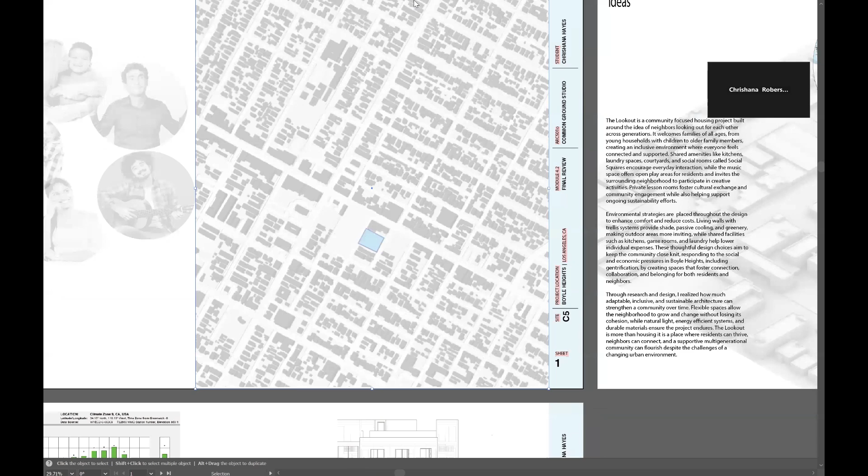The Lookout is a community-focused housing project built around the idea of neighbors looking out for each other across generations. It welcomes families of all ages, from young households with children to older family members, creating an inclusive environment where everyone feels connected and supported.

Shared amenities like kitchens, laundry spaces, courtyards, and social rooms called social squares encourage everyday interaction, while the music space offers open play areas for residents and invites the surrounding neighborhood to participate in creative activities. Private lesson rooms foster cultural exchange and community engagement, while also helping support ongoing sustainability efforts.

Environmental strategies are placed throughout the design to enhance comfort and reduce costs. Living walls with trellis systems provide shade, passive cooling, and greenery, making outdoor areas more inviting, while shared facilities such as kitchens, game rooms, and laundry help lower individual expenses.

These thoughtful design choices aim to keep the community close-knit, responding to the social and economic pressures in Boyle Heights, including gentrification, by creating special spaces that foster connection, collaboration, and belonging for residents and neighbors.

Through research and design, I realized how much adaptable, inclusive, and sustainable architecture can strengthen a community over time. Flexible spaces allow the neighborhood to grow and change without losing its cohesion, while natural light, energy efficient systems, and durable materials ensure the project endures.

The Lookout is more than housing, it is a place where residents can thrive, neighbors can connect, and a supportive, multi generational community can flourish despite the challenges of a changing urban environment.

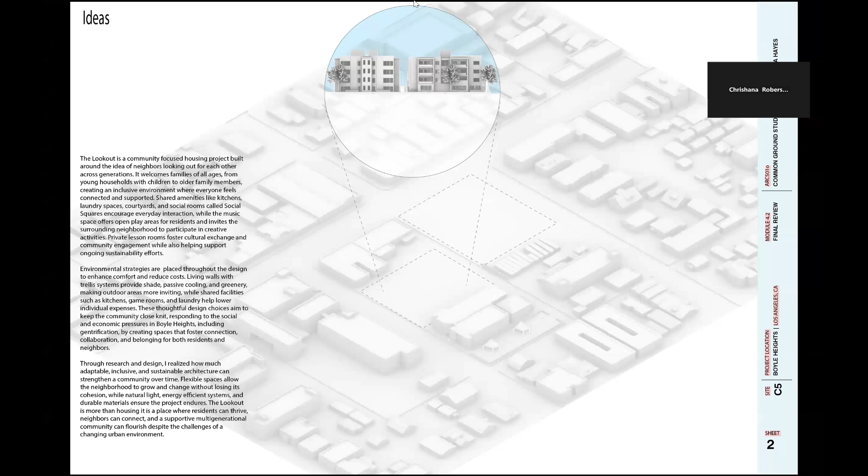Just a quick overview of my project progression. Initially, I started off with the typology of row housing, and that's just because I'm from Philadelphia and I'm used to the row house feel, and communities feeling like they're close-knit communities with people looking out for one another.

It wasn't really working out for me because I was only able to get 17 units on our site, and the site is already small. It's 25,000 square feet. Therefore, I ended up changing the typology and building up more and staying away from duplexes, and I was able to get 44 units on site. But I did keep the idea of the Lookout by naming my project the Lookout.

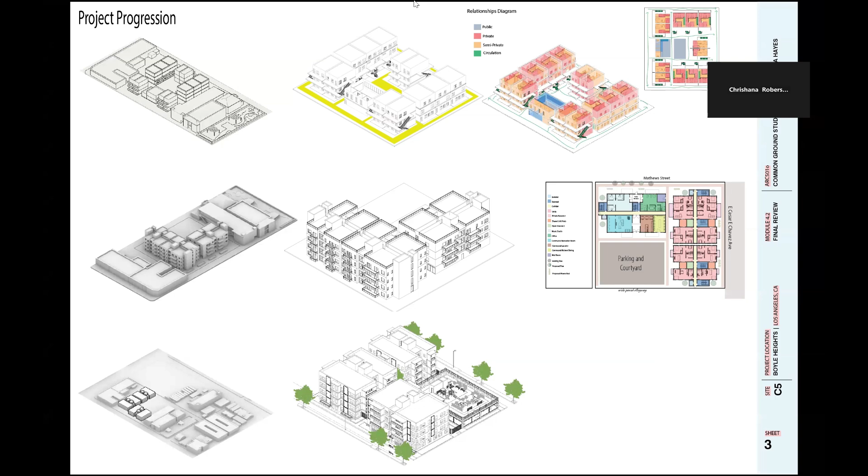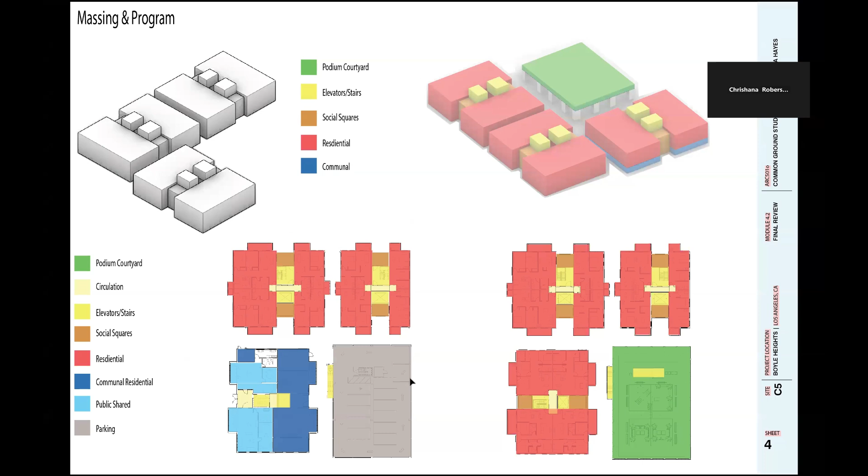Massing program level 1 here. This building only consists of communal residential and public shared spaces. Levels 2, 3, and 4 for this building consist of residential units, while these two buildings here consist of only residential. Level 1 for this area is for parking, while over here level 2 is for the podium courtyard.

This is the site. We're located at Mathews Street and Cesar Chavez. It's 170 by 150. Setback for the front and back is 15 feet and the sides are 5 feet. And then here's the neighboring proposed site.

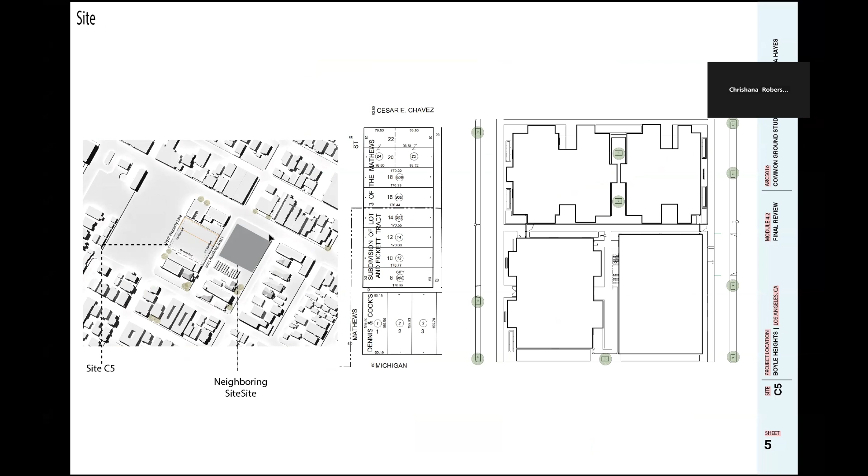Due to frequent heat events, my project has 3 buildings with the main entrance facing west and the other 2 facing north. Each building has balconies and windows positioned for cross ventilation, allowing cool air to flow through and push warm air out. The walls feature trellises with plants that provide shade and help cool the air naturally.

Instead of the rooftop spaces like I initially wanted, I included a podium courtyard at the east end, shaded by greenery and sitting above the parking below.

This courtyard not only keeps surrounding units cooler, but also reinforces the Lookout community feel, serving as a central shared space where residents can gather, interact, and feel connected to each other. And then right here, we have a quick example of HVAC systems.

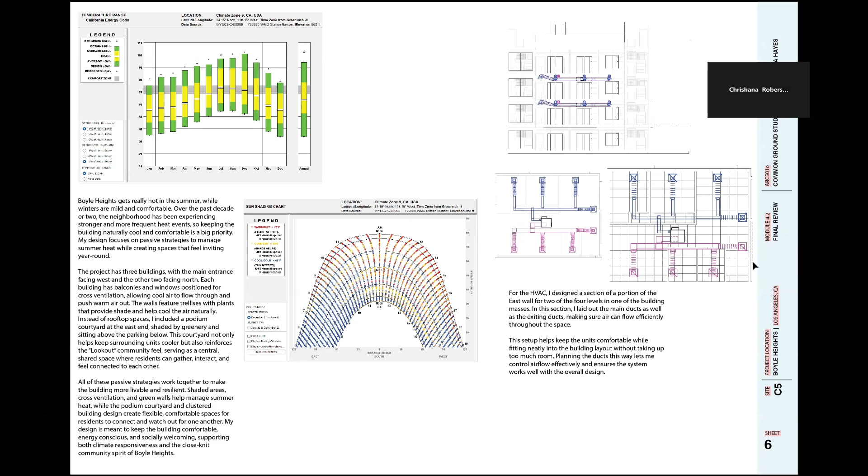Okay, have the floor plans for level 1, level 2, and levels 3 and 4, which I will explain. Okay, this is the podium courtyard.

It has an access point here from the outside, and then from the inside, from the parking below, it has access from the stairs and elevator. It consists of a walking path for residents, a children's play area with a playground, and then a seating area for adults and children, but plenty of seating areas. And then here we have some shaded greenery.

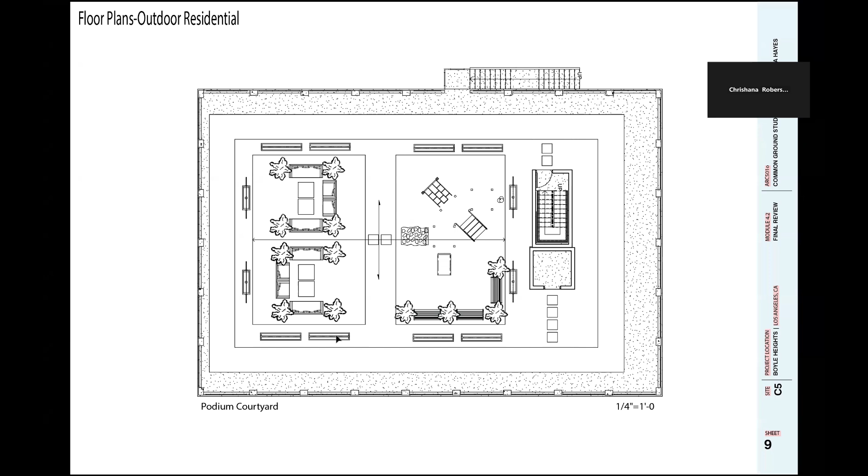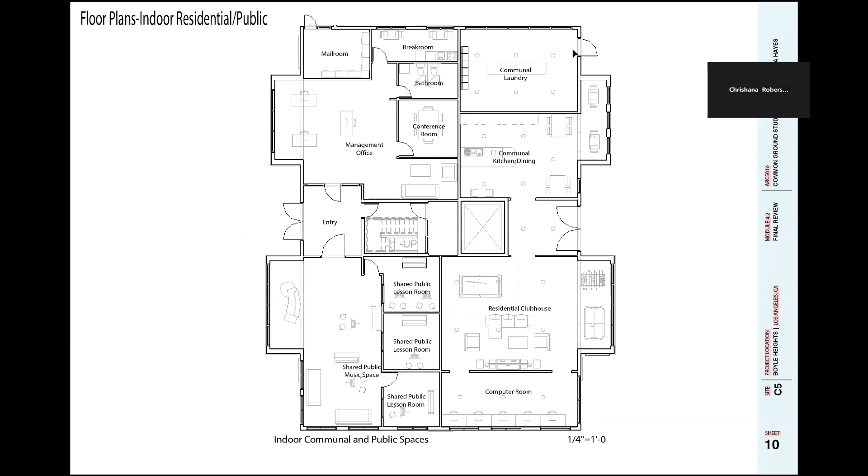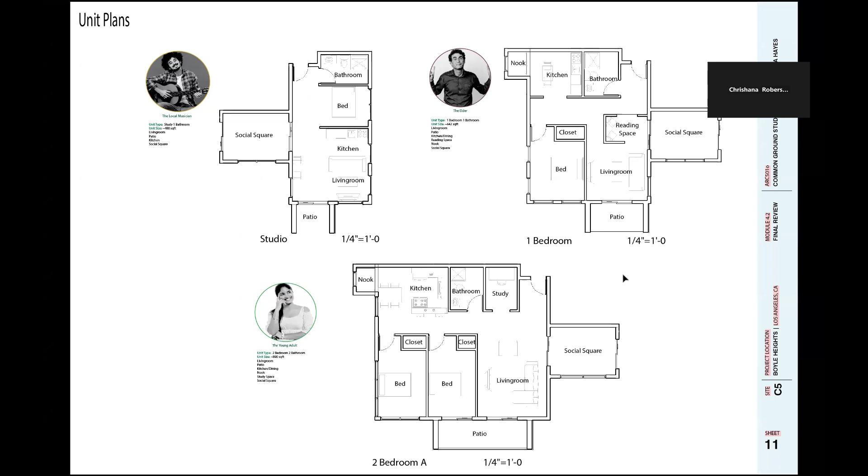So this is for the young adult, she is a student. It's a 2-bedroom, 1 bathroom. It does consist of a study and a nook as well. I wanted to add that for these specific units, they do offer the individual lease by room option for college students to make it more affordable.

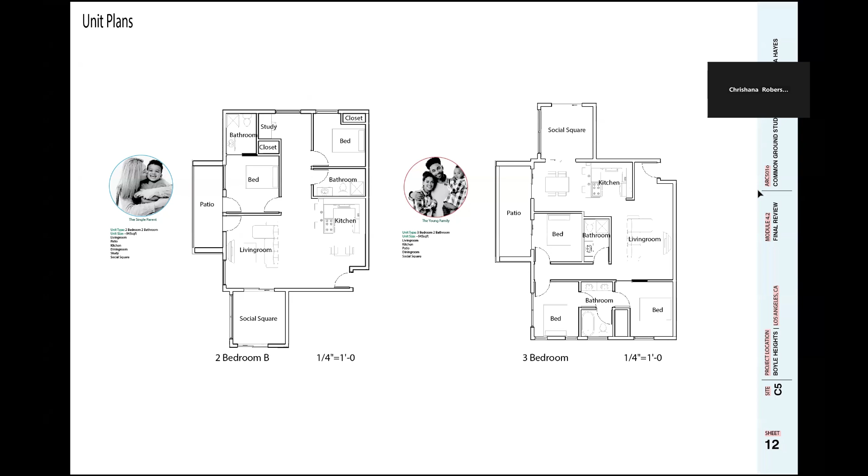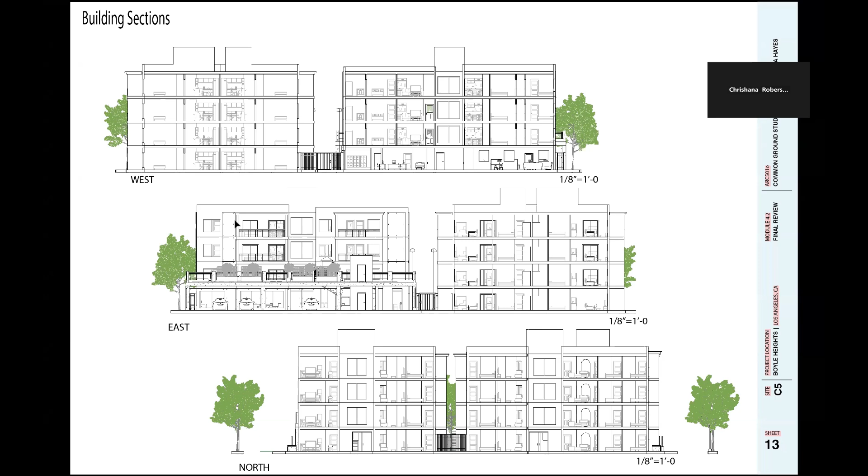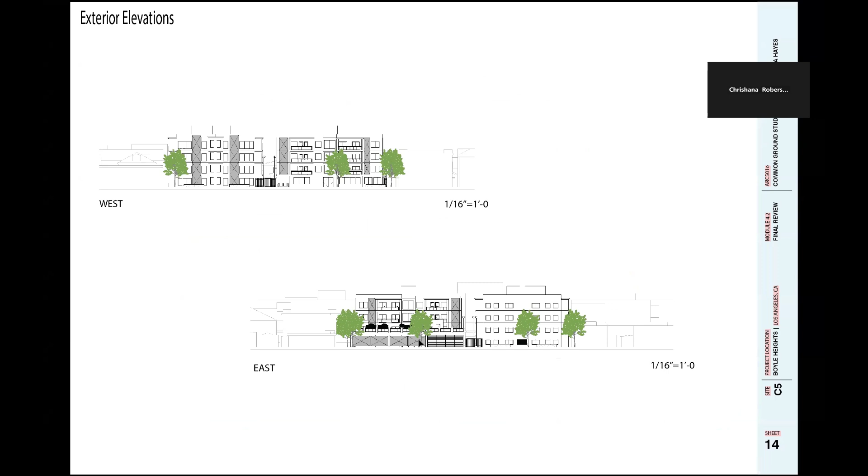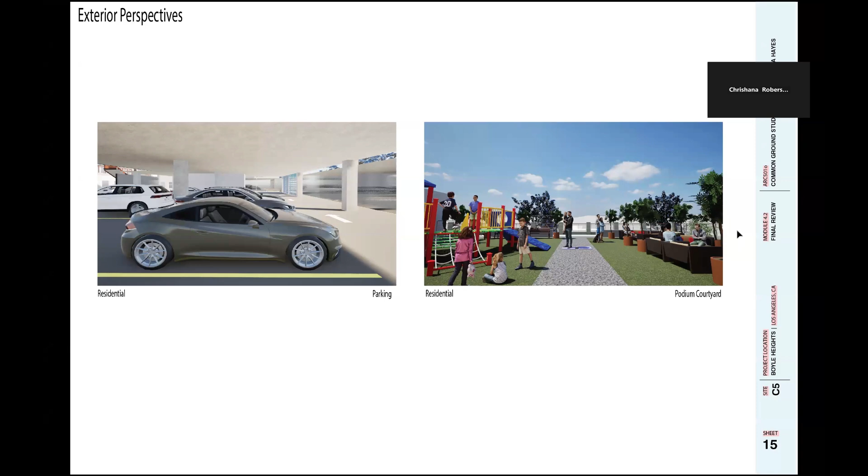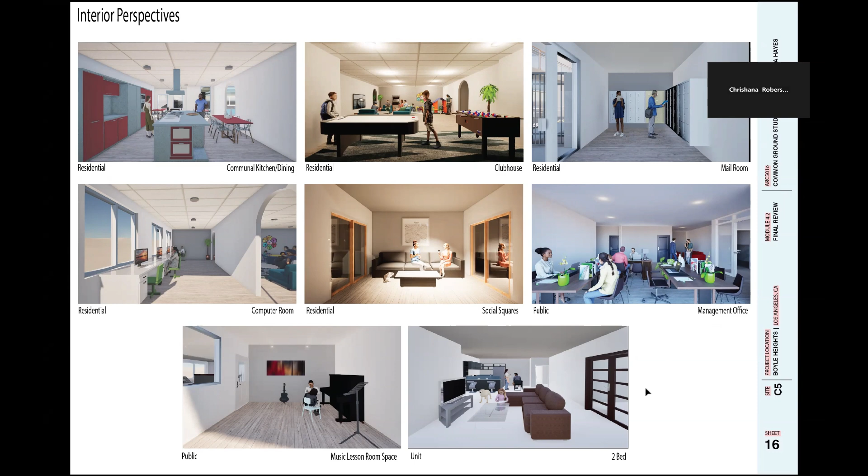And we have the mailroom, the computer room, the social squares, which is my favorite. The management office, the music lessons room - this is the private room, not necessarily the larger space out here. And then we have an interior photo of a 2-bedroom. Thank you.